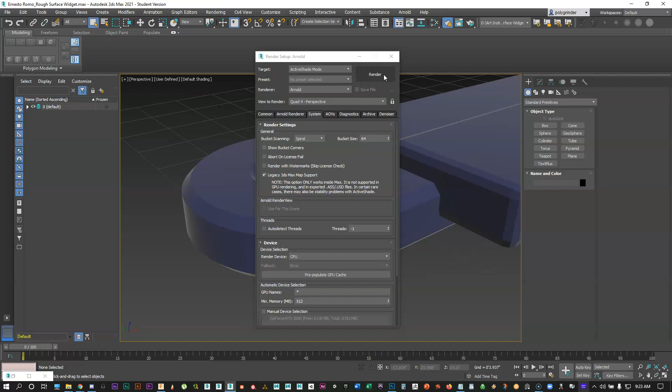So we need Arnold on, we want active shade on, and we want max legacy support. Let's don't use all our processors, let's take one down. And let's use HD 1280, that sounds fine. And we'll leave the default shader, default rendering. It'll be faster, it's grainy, but that's okay. And so render, and here's what you have.

Okay, so this is what you got going on here. So we're going to break this down into two different things that are going on overall, which is the breakup between our painted surface and our metal surface, and then the grunge that we're putting on here.

Okay, so what we're trying to do here is this is a piece of metal that was like on maybe a tractor or something like that that's been sitting outside. And it's been banged up and the weather's been getting to it. And so that's what we have.

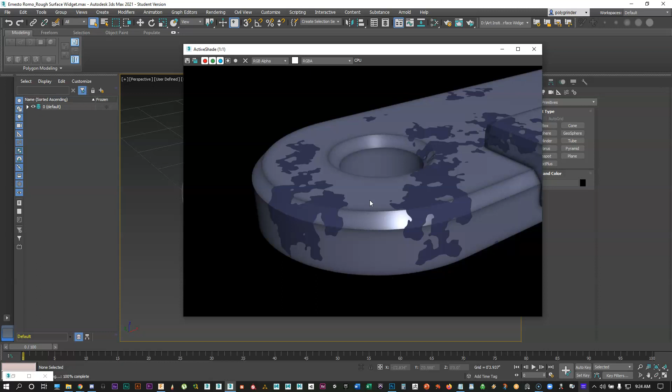Personally, I never seen a purple tractor, so I'm not going for purple.

So let's see what we got going in here. Okay, dirt, paint. Okay, so here's our paint. So I'm just going to apply the paint to it first. So I need to pick it. And we're just going to apply the paint, so the paint is the only thing on here.

Now you've got, looks like you've got an AO going on in here. Yay! Okay, I don't know why in the hell you have it plugged into base weight. We do not want it there, so let's get out of there for right now. But it looks like you may, I'll come back to this, but that's a nice node structure. Very nice. Okay, so let's see what we got going on here.

All right, so I'm going to change my base color. All right, I have a problem right off the bat. Some of the things you're setting in here, I can tell you have no idea what you're doing. Okay, first of all, we do not want simple materials. We want advanced materials because we're advanced people.

Okay, metalness. This will never be anything other than 0 or 1, okay? So the way you have to think of things is something is either a piece of metal or it's not a piece of metal. It's not partially a piece of metal. So 0.24 says, hey, I can't really decide if this is metal or if it's not metal, so I'm going to make it some weird hybrid that is partial metal. No, it's either metal or it's not.

Now, if it's a piece of metal and it has paint on top of it, it's no longer metal, it's paint. You get that? Okay, so since this is the painted surface, and right now we got a bump showing up on here, so I'm just going to turn that bump off. All we got to do is go down here and just uncheck it here, so that's not in our way. So we know this is not a piece of metal, it's a piece of painted surface, so this should be 0. It is not a piece of metal.

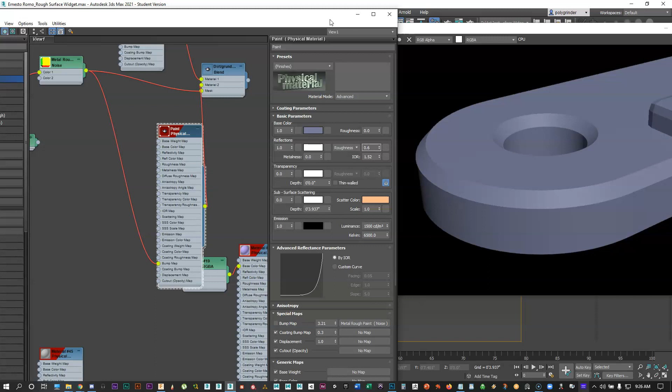Now, I want to look at what you got going in here too. Let's look at your actual piece for a second. So I'm going to turn this off. Let's just look at our geometry, and it's yikes. Okay, I'm going to save our active perspective view right here so we can come back to this.

And what the hell is going on with this? Okay, this is not what we're doing. First of all, this is supposed to be a 45-degree angle in here, and what you did, shame on you. All right, what happened was, I'm just kidding.

All right, so let's go ahead and put this shader on this too, so we have something in here.

What happens is when I did the original video and we made the little boxes in there and we chamfered the edges, that chamfer tool is different now in Max 2021. I think they changed it about 2019, maybe 2017. It's the same thing doing the chamfer, but it puts an extra edge in here now, which is right here. We want this, sorry, not this one, this one. I'll take it back. It's this one. That should be 0.

So I don't know why they did this, but well, I know why they did it. It's just confusing to students when they've seen my original one. They just go put the chamfer on, they don't pay attention to what's actually going on, which is kind of depressing because you should be paying attention. So this should be 0.

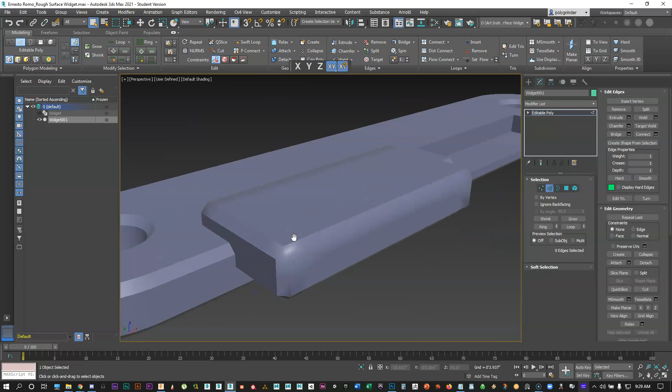Grid off. We got the same problem down here, got to get rid of that. Okay, so now that's back to what we want. But the problem you're going to get into is now it's got a kind of a rounded edge.

Now, the other thing, let's look at your Vertex Paint that you got going on here. Let's pull that up before we go any further. Let's go to our Vertex Paint and let's turn this on.

Okay, yikes, I can tell that you don't understand how things weather. So what happens? This is what happens. We have a piece of metal, we paint it. Why do we paint it? So it looks pretty? No. We paint it because we have moisture in our air, we have water in our air. Water is an acid. We don't think of water as acid because we drink it all the time, but basically it oxidizes things and so it eats metal. If we don't paint our metal, the water gets into it and starts eating it and rusts it. That's why we paint it.

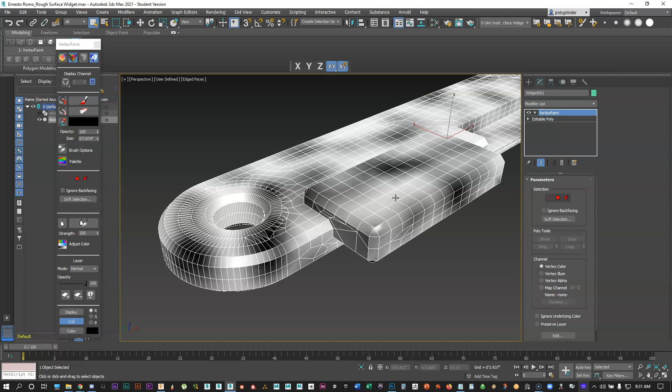Now, so the paint over time will start to deteriorate. Where does it deteriorate? Well, it deteriorates in 2 places: wherever humans come in contact with it by rubbing it or scratching it, and/or where the edge of a piece of metal is. So in other words, where this edge is right here, and where that edge is, and where this edge is, that's where the paint's gonna start breaking down.

So you're just kind of randomly painting things on here, and to a certain degree, I don't have a problem with that. But you're not paying attention, oh well, this edge is where it will start breaking apart, you're just randomly placing things. And that's one of the problems with students when they first start texturing, they just think texture is random, I just put random patterns on it. No, we don't put random patterns on it. We kind of put random patterns, but then we specifically put them in specific places where they would really be.

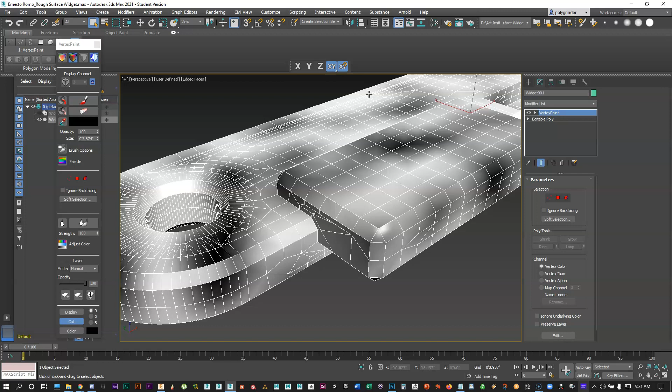Now, this piece is not built correctly. You were supposed to put a Retopology Modifier on this. So I'm going to just dump this Vertex Paint right now. And I forgot to turn, oh now I'm going to leave it on so we can see it. Now to turn it off, if I went into my object properties, I could turn it off right here, but I'm going to leave it on. Okay, you were supposed to, and of course I wrote about this, because you just ignore me, you're supposed to use a Retopology Modifier in here.

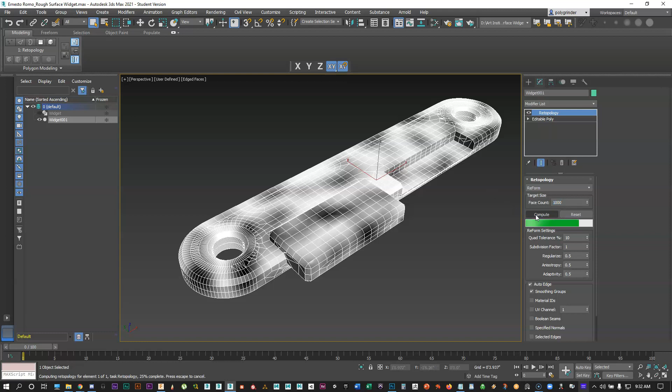Okay, this is a new thing in Max 2021. You got to make sure you're updated to the current version, and then it will. And we do not want green wireframes with black wireframes.

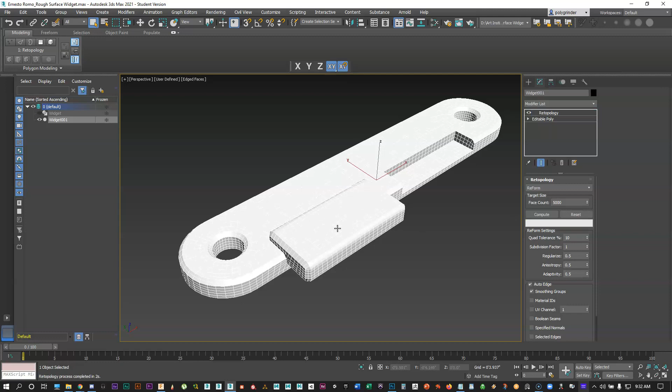And it will retopologize this. Okay, let's go back to 5,000 and see what that looks like. And that looks pretty good. Okay, now that looks nice.

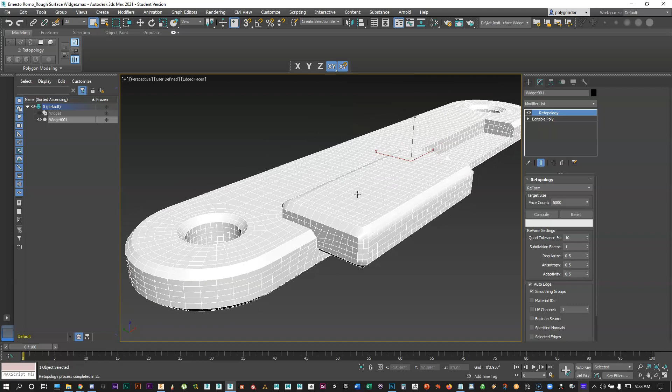Now, the problem that you get into is it dumped the Vertex Paint, which I don't like your Vertex Paint anyway, so we don't really care. Okay, so we're going to convert this to a poly now, and now that's a nice flow of geometry. Nice flow. Okay, but it messed up our smoothing groups.

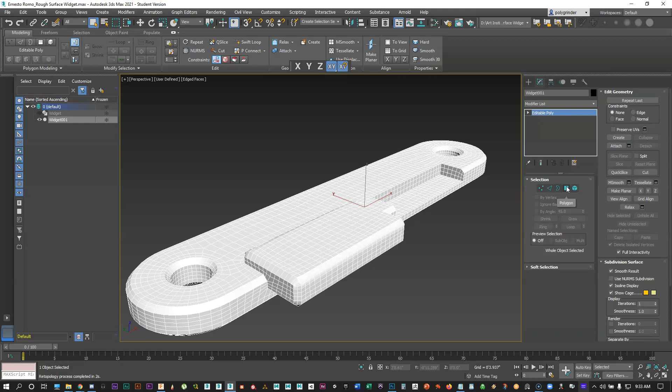That's easy to fix. There's two ways to fix it. One way: go to polygon, select them all, go down here to auto smooth, about maybe a 30-degree angle, and hit auto smooth, and that will fix that. Oops, I need a lower angle. That's right, 15 degrees.

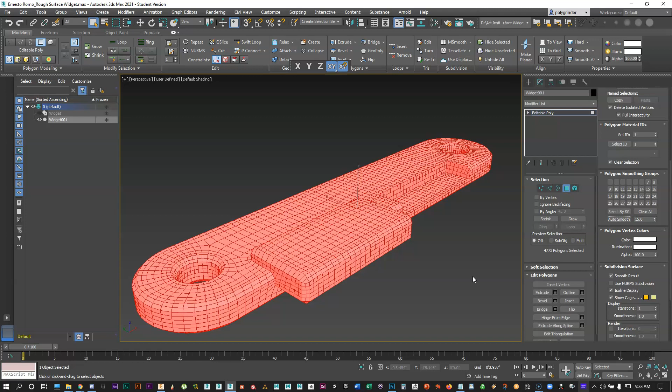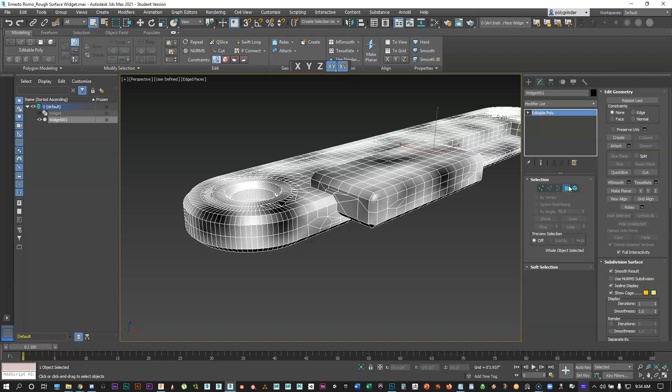That's better. I don't like the way that creates some of that geometry. Let's go back. I don't like that. And a lot of that probably had to do with you didn't have the smoothing groups corrected on this.

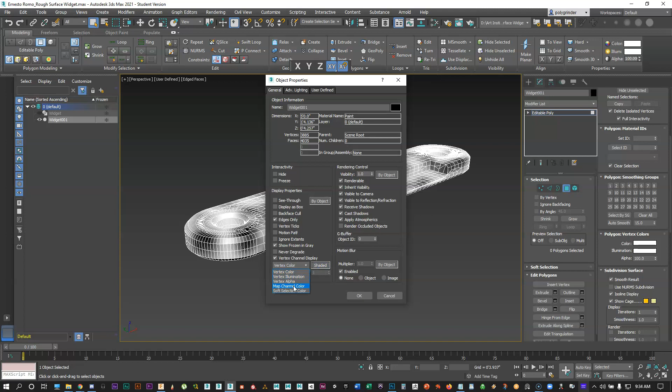So let's dump our smoothing groups, 15-degree angle, auto smooth it, and let's turn the Vertex Paint off. So we want map channel. Actually, we just want to turn this off. Okay, all right, so now, yeah, see how we got nice angles in there once we reset that smoothing group.

And I got a problem right there. It'll probably fix that. I guess you never looked at your geometry, because you got vertexes overriding each other there, which is easy to fix. All you have to do is go to vertex. You want to constrain it to edge or face and untangle that.

Pay attention. Here's the thing that you need, a concept you need to embrace: the computer is stupid and evil. Nobody's paying you for the computer. They're paying you to watch and monitor the computer. And when it does stupid and evil things, you fix it.

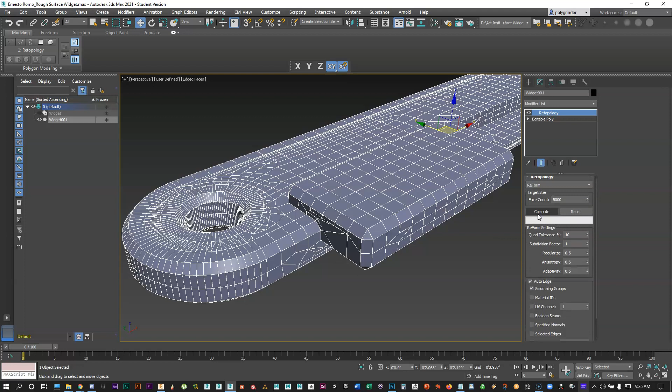All right, now let's try, see if we can't do this retopology again. And we're going to have it on smoothing groups. And your smoothing group was screwed earlier, and that's probably why it gave us funkiness. Yeah, that's much better. Okay, and then we need to fix our smoothing groups.

Let me show you a different way to fix the smoothing groups. There is a smooth modifier you can drop on. This is another way you can do it. So if we put a smooth on it, oh, looky there. Okay, now it's giving us this in here.

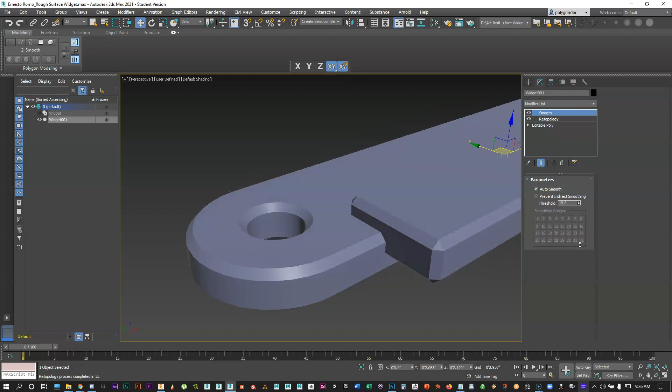I'm going to auto smooth. And we're setting an angle, and our angle is 30 degrees. If this is too low, then we start getting that faceting. 30 degrees. We just want to check, see, we only get sharp angles where we get sharp angles. There we go. Yay! Okay, now this piece is fixed.

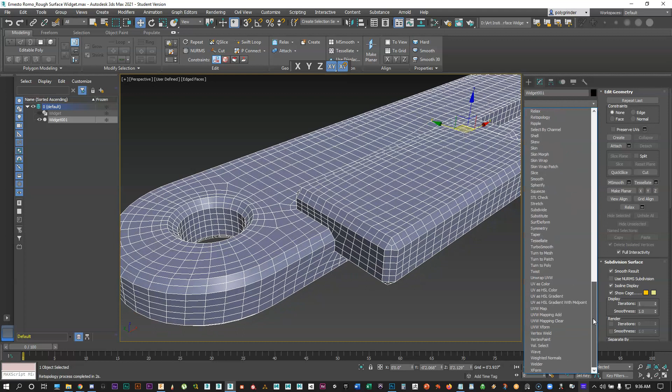Okay, this is what you should have done way back when you first created this piece, and I went in and said, hey, dude, it's not right. Okay, so now we're just going back in and do our Vertex Paint again.

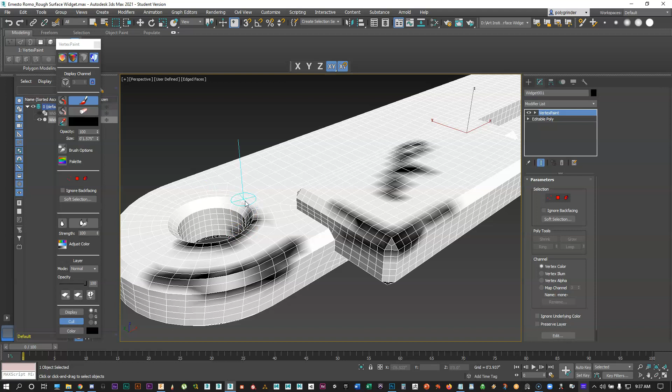So we turn it on, and we're going to go in here, and our paintbrush is way too big. We're going to turn it down, and where it's going to accumulate is around in here. Okay, this is where it'll accumulate on these edges. Can we have some going through the center? Sure, but we know the edges is where it's going to accumulate because that's where it's going to be stressed.

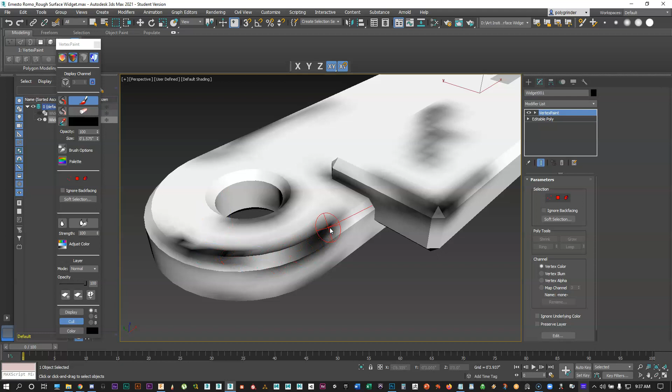That's where the piece of metal is going to be stressed, okay, anytime there's angles in there. Now, I have a tendency to also come back, and I have a tendency to come in here and say blur all of it, and it's going to blur that. It gives me some gray out in areas, which will help me later on. Then I come back on here, and then I paint back on here again. Okay.

And the thing about it is, which is nice about this, is we can always come back later and decide we want to put more in. Okay, so there we go.

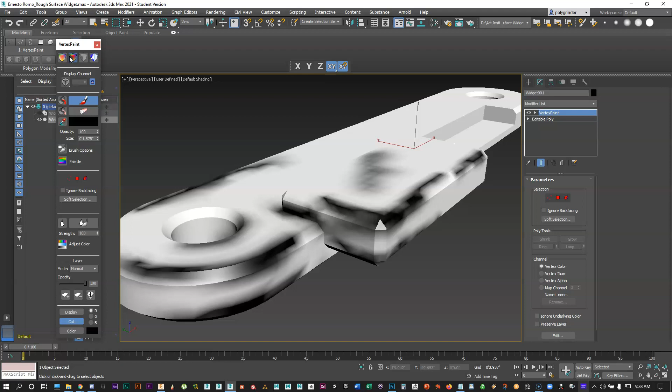All right, so we always want to be sure we turn this. Go back to your vertex color display, turn it off so we don't see the vertex. And then we can go ahead and bake this in, because we can always just add it back on and then it'll come back to us.

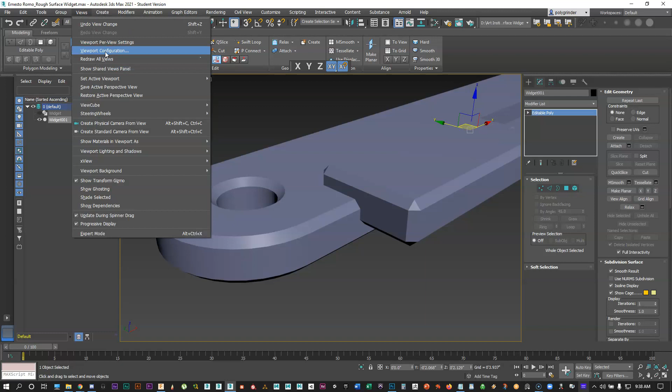Okay, so let's go back to our restore our active view. So now another thing I would do, and of course this isn't in the video, but this is what I would do, is we don't really want these sharp edges.

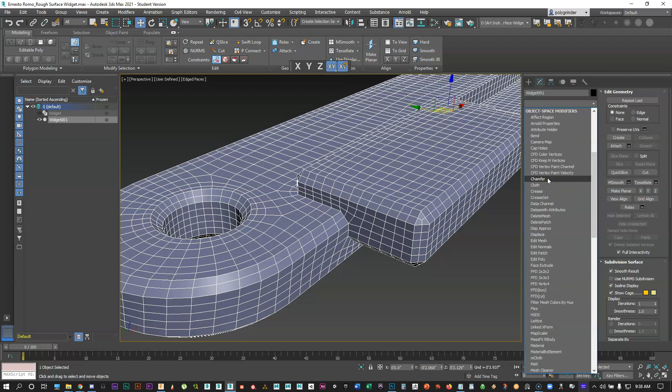So what I would go ahead and do is put a chamfer modifier on this. Now eventually, initially it's going to explode it. That's because this amount is too much. Just right click and zero it out.

And then we're just going to give it a little bit just around that edge, just a little bit. We don't want it too big. And we want at least 2 segments in there. And then that's going to catch nice highlights on it.

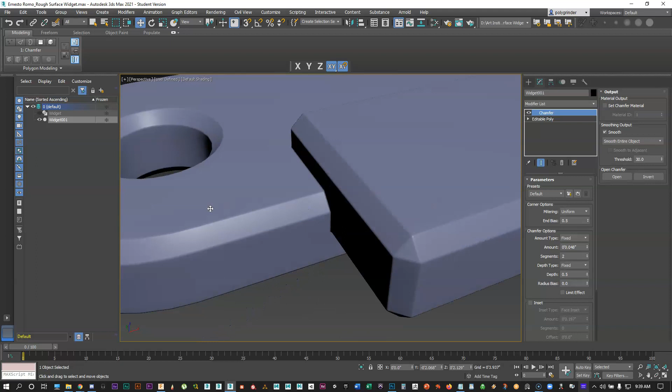Look at that nice highlight. Look at that. Oh, yeah.

Okay, it's still a little facet in here, that's okay. And if I wanted to fix that later, I can come in here. I can put a MeshSmooth on there, and it would only take 1 iteration most likely to smooth that out.

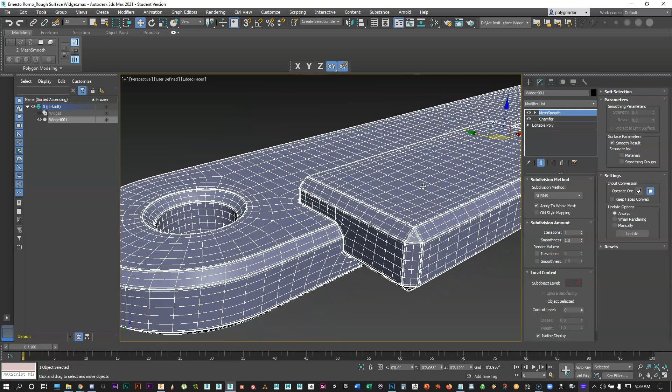And that looks pretty good. Let's go back to our restored active perspective view. Now, I usually try to hold one particular view when I'm working on it. That way I can render it and then I can come back and look at it at the same place all the time. And so now we've got a nice piece, nice rounded edges, looking really good.

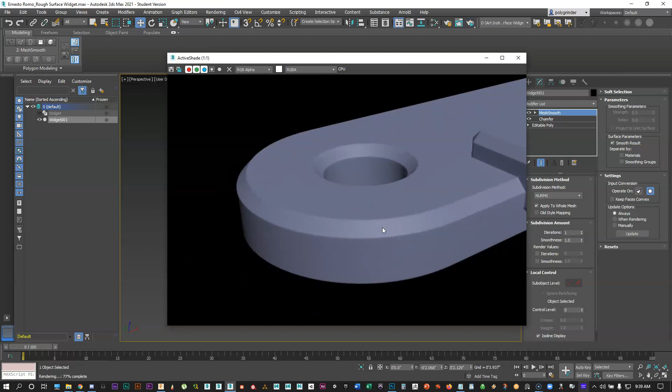It's got a nice kind of a matte color on here. I don't want purple. What the heck? We don't want purple paint. I'm going to go for something a little bit more natural looking.

Maybe a tan or something like that. Purple's pretty, I don't have a problem with purple. I don't have purple tractors. Okay, yay, okay, so now we're cooking.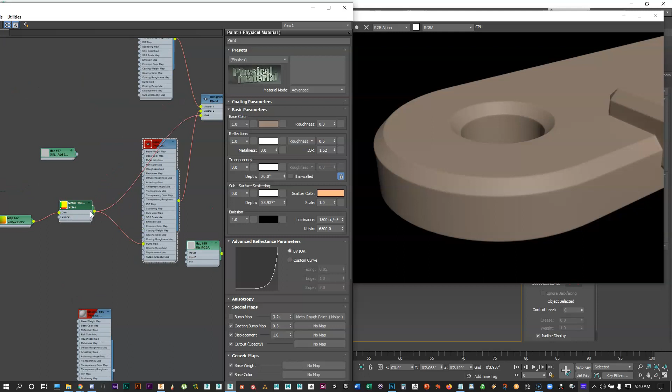We're cooking. All right, so now let's look at your noise that you got in here. So initially what I'm going to do is put the noise in my base color, which is just going to allow me to see it. Now I'm going to take off my vertex color.

I just want to see the noise first. What kind of noise you got going in here? And that looks pretty good. Yeah, that looks pretty good.

Okay, so let's plug this back in here. I think the noise is a little big maybe. So I'm going to go to our noise and bring the size down a little bit. Let's try 1. Yeah, I like that breakup better, it's a little bit better.

Okay, so now you put, you've enabled this curve. Okay, so now what we're going to do is let's just turn this off and we're going to turn our bump back on. So go back to our paint and turn our bump on.

Okay, now you're going to see a little bit of bump in here, but here's why you're going to have a little problem with your bump. It's how deep the bump is based on the angle of this line. Since this line is straight up and down, it's going straight back and it's hard to see.

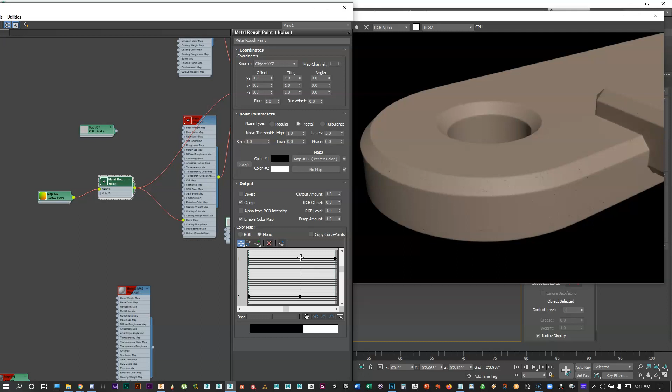So what we really want to do is I'm going to constrain this right now with this here where I can only move it left and right. And as I pull this over, you're going to see our bump jump out. Woo! Check it out, bump is kicking out there.

Okay, so that's based on the distance of this angle. So that's a little bit more natural looking. All right, and of course, down inside of that's going to be our metal and up here is our paint.

Okay, so if we actually go in here right now, this has got its dirt and grime, and that's not really, this is metal, and we're going to make it rust like it's a rusted piece of metal. And so for right now, later I'm going to do a little bit more, but for right now I just want to get a rust kind of color in there.

Okay, and then we're going to apply this, and now that's going to drop that in there. Okay, so now you got a rust color, and now I might want to boost this a little bit.

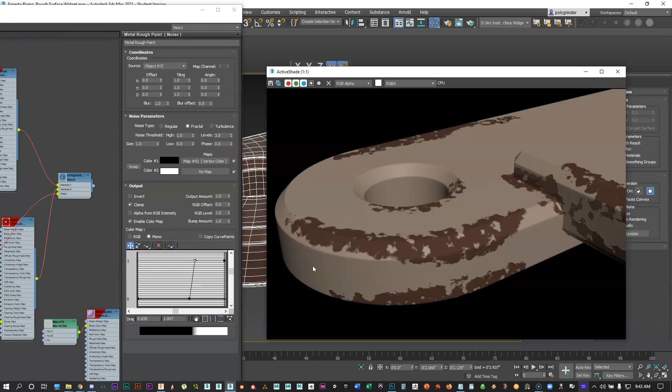Yeah, now I'm getting some nice kind of crevices in there. Let's move this over a little bit. Yeah, it's looking good. Okay. Now I can add more or less of all of this if I select both of these and I drag left or right. Now if I want to limit it to just left and right so I'm not accidentally moving it up and down, and I can determine how much rust I want in there.

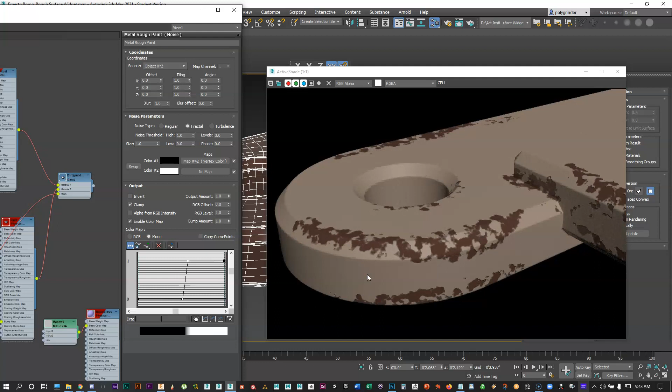Okay. If I want a lot, yikes. Okay, it's too much. Find that happy medium. Okay, what it really should be is a painted surface with a little bit of rust showing, so it doesn't get a little bit too overbearing. I think something maybe like that, and like I said, we can come back later. As a matter of fact, I'll show you how we can do that right now, which is kind of cool when you have active shade.

I don't think you were using active shade, and I keep telling everybody to use active shade, but everybody just ignores me. Yes, I have no idea what I'm doing.

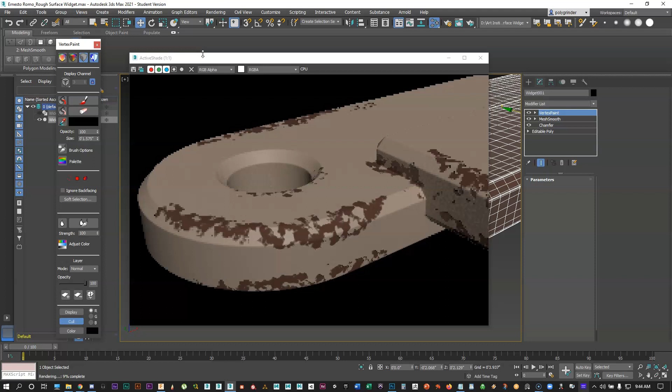So all right, we're going to bring our Vertex Paint back in, and what's cool about this is if I come in here and I start painting on this, oops, let's turn it on where I see it. Okay, you'll see that this updates in real time in here. Check it out. Maybe I want to switch this to white, and I want to come back in and trim in on that a little bit. So I can sit here and paint in this in real time and see what's going on by going over here. Well, that's cool. So let's turn this back off. We can come back to that later.

Okay, let's see what else we got going here. All right, now here's another thing: I like to have a little bit of a bump going out into the paint, so there's actually some puckering going on here. Now, the problem is that means that this needs to go up above 1. I'm going to go here, and it needs to go up above 1, and nothing is happening. And the reason is because you've got this button, clamp, in here. And what clamp means is that if I happen to drift above 1 at the top or below 0 at the bottom, it's still going to read it as 1.

When I turn this off, then it's going to say, oh, well, it's okay if this goes out above. And now you'll see I'm getting some puckering up in here as I bring that up. I can also bring this one down a little bit. So now I'm getting a little bit of wrinkling in here. Here's another cool thing you can do. I'm going to go in here and add a couple more points, and I'm going to take this one and pull it down a little bit, and it's going to create a little ripple along that edge. Woo! Check that out. So you have all kinds of different things that you can do in here which will modify this. You kind of need to play with that a little bit.

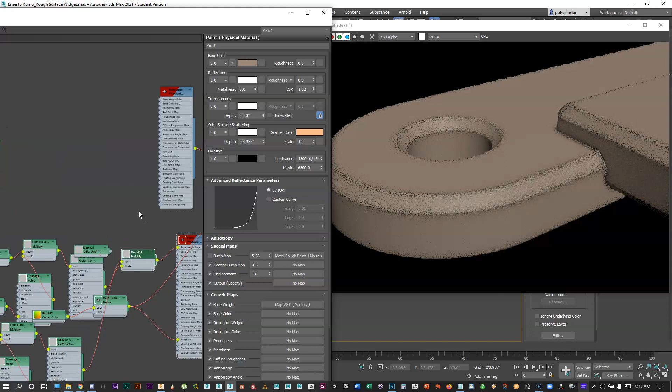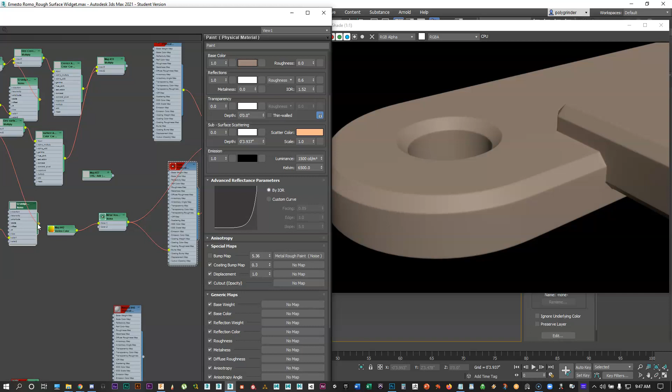All right, so now we're going to get into this dirt that we wanted to put on here, okay? Now, you were putting the dirt in the base weight, which, yes, that puts some dirt on there, but no, that's not where we want it. But I want to kind of break down what you have going on here. So this is your Grunge Noise. So I'm just going to put it in our base color, and it's just going to drop black and white in here where I can kind of see it.

And to me, it's too small. This has got little dots on it. Okay, so right off the bat, this is too small. Now, we've got a scale in here, and you're having to set all this. That's kind of a pain to set, you know, so you have to set X and Y and Z, which I find a pain. Let me show you a little trick.

If we come in here under our maps, under OSL, we go to Math, Float, we go to this first one, Absolute. All we have to do is plug this Absolute into our scale, and then it zeroes our scale out, and the Absolute is the control for all three of these at the same time. So now I can sit here and dial this in with just one control.

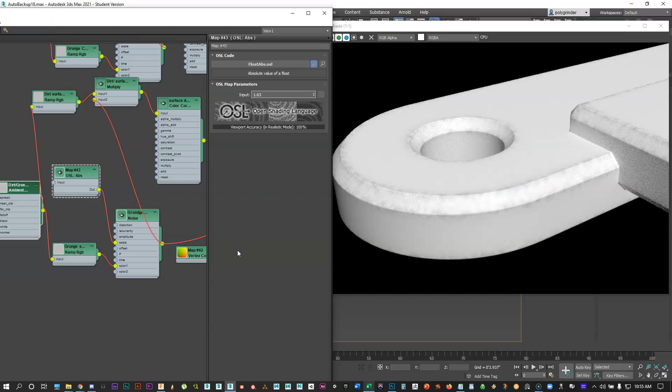Okay, you had it around 5, so you have these little bitty dots. I don't want that. I'm trying to get it to look more like it's broken up. So let's crank it down a little bit more. Maybe somewhere around that. Looks pretty good. All right, so pull that. So now put that back in, and that looks pretty good. I think maybe a little bit. Maybe something like that. Okay, that looks pretty good.

All right, so now you had plugged that into our base weight, which is not where it goes. Now what we want to do is come in here and get a mix where we can use this as a mask to mix some colors. So if we just come up here to our search and type in mix, it's going to list a bunch of mix maps for us. Now the thing we have to know is you'll see that some of these say Arnold, some say OSL, so you'll see a mix where it says maps general right here.

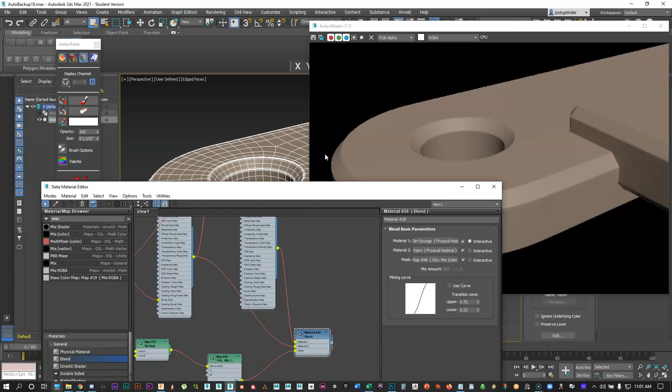And then what we're going to do is use this mask that I've created, and it's going to be the mix between the two. And then I apply this to my object. Oh, sorry, we don't need this mix anymore. That was just for color purposes. We just need the mask.

Okay, so now it's got my paint in here, and now you'll see this has got a light color on it because this grunge I've not set. I want to change it to my advanced. I do not want hardly any reflection in it. I do want quite a bit of scatter on it, and then of course I want to change this into my dark grunge color.

So now the dirt is back on there like I had it before, but now I have a control for the sheen of the dirt, and I have a control for the sheen of the paint. And so now instead of the paint going directly in here, this is the new paint node, and then we assign this back to it, and now we're back to where we were. Okay, so on our paint here, we've got to go back in and turn our bump on our paint back on because we turned that off before.

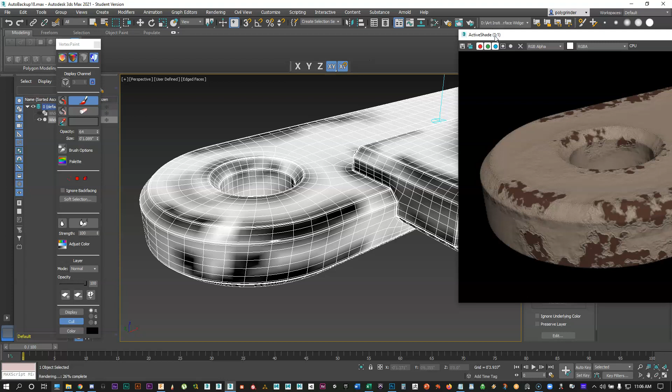A little bit of puckering in there. Make it a little bit darker. Let that build up. And then we'll start getting a little bit of paint showing in there. Okay, so hopefully that's helped you.